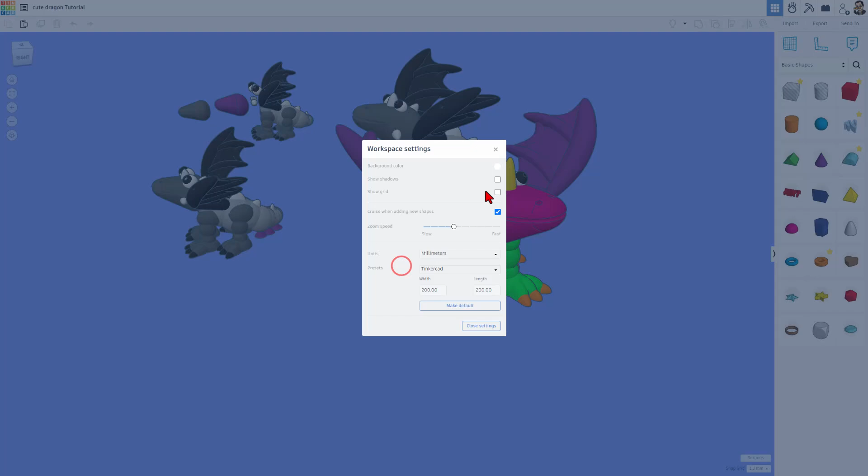That's why the colors are as they are. Normally I work with it set with the preset white, and then I also turn on the shadows and the grid. That is where I like to build from.

I have also taken my large original dragon and made one a little bit smaller. This one prints faster and I use it when I'm just giving them away. I'll also zoom in here quick and show you that I've added my own supports so that the tail prints more accurately.

The other reason we're in here, friends, is because I see users say, hey, my project is not editable. See how I can ungroup that and change things? Let me show you how users end up with projects that aren't editable.

Whenever we want to send something to the printer, we select all the pieces and then hit export as an STL. You could also use an OBJ file. It's really up to you.

I'm going to export mine to my 3D modeling folder, and I'm going to call this Cute Dragon. Instead of the word tutorial, I'm going to put July 2024, or just 24. Now it is saved for 3D printing, and it's a single piece.

The problem users have is they get back to the beginning of Tinkercad, they start a new project instead of opening their project. I'm going to change the name to Dragon STL because I'm trying to help you understand what is happening here. And then they import that STL they created.

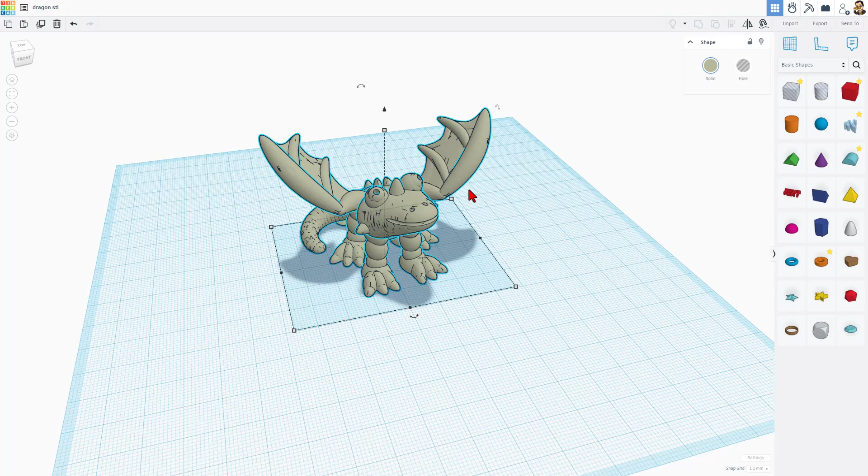This is one of the cool things about Tinkercad, that you can import STLs, whether they were created in Tinkercad or other projects. But when you import them, it takes a bit longer for Tinkercad to interpret them. After a minute, it shows up.

And as you'll see, it is a single shape. You cannot ungroup and edit it. Now, you can use brute force, so like I can bring out a hole.

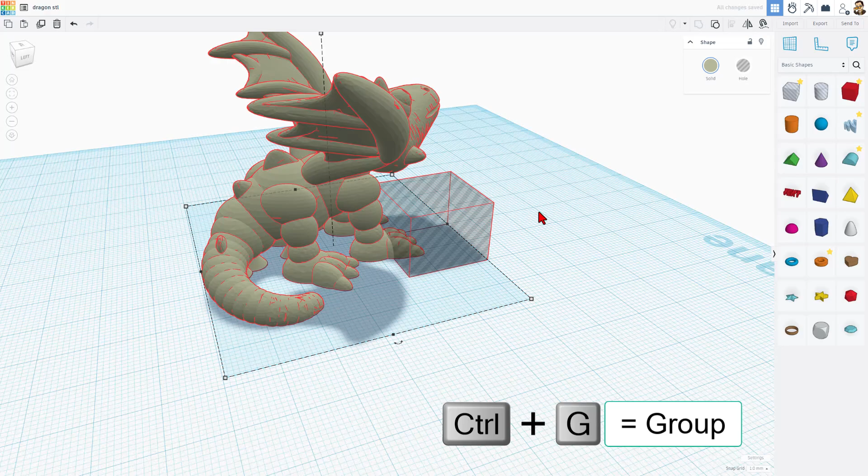And if for some reason I wanted to cut off some of the toes, I just put this where the toes are. And if we group those two pieces with Control G, notice it is editing the entire part using brute force, which can be handy for some STLs.

Say you find one on Thingiverse, but it is definitely not handy if you actually created the Tinkercad project.

I'm going to quickly bounce back to our other project and show you one more time when we hit Tinker This. These load quite a bit faster, even though I've got all these different iterations in it. And that same foot, I can click on it and ungroup and modify to my heart's content because I saved it as a standard Tinkercad file.

I see that question quite a bit on Facebook groups, so I'm hoping maybe this will clear it up.

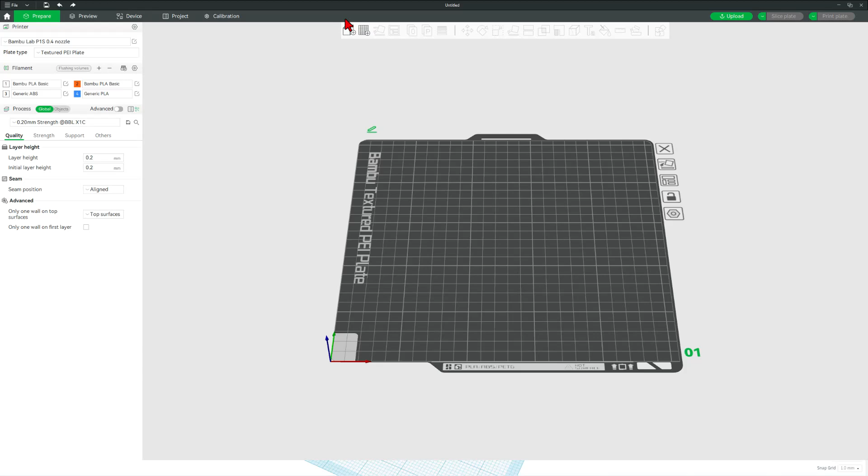We're going to choose Create Brand New 3D Project, and we're going to hit the plus sign to find that cute dragon STL that we made a moment ago. I'm going to switch to just the normal 0.2 standard.

I'm going to quickly bounce out to the device menu and update this PLA. Instead of generic PLA blue, it is now the generic PLA Purple Rain.

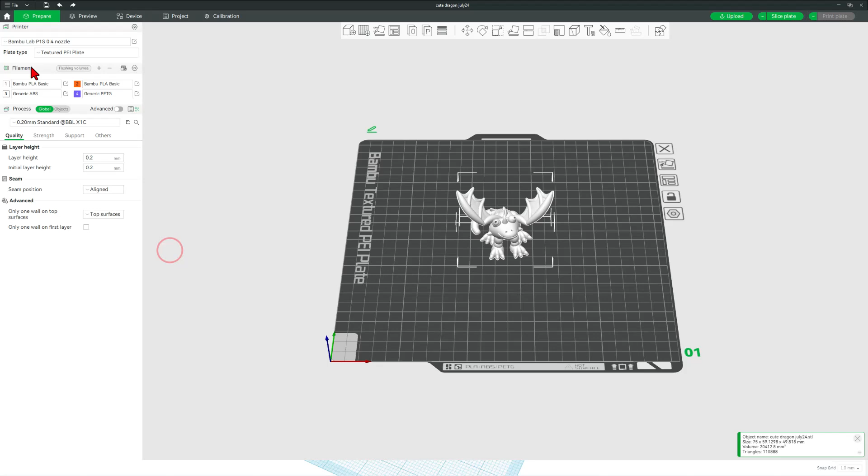When we edit it, instead of generic PLA, I want to set it to generic PETG. I'm going to make sure that color switches to the purple that we've got in there, and confirm. Once that's confirmed, I'll go back to prepare, click up here, and resync. Notice now it shows our purple and our generic PETG.

I can now right click on the dragon and change that filament to the PETG, and we can slice the plate. Notice if we zoom in, it did not add supports. That's one of my favorite things about this project - I made the wings at angles so that it is actually printable just like this.

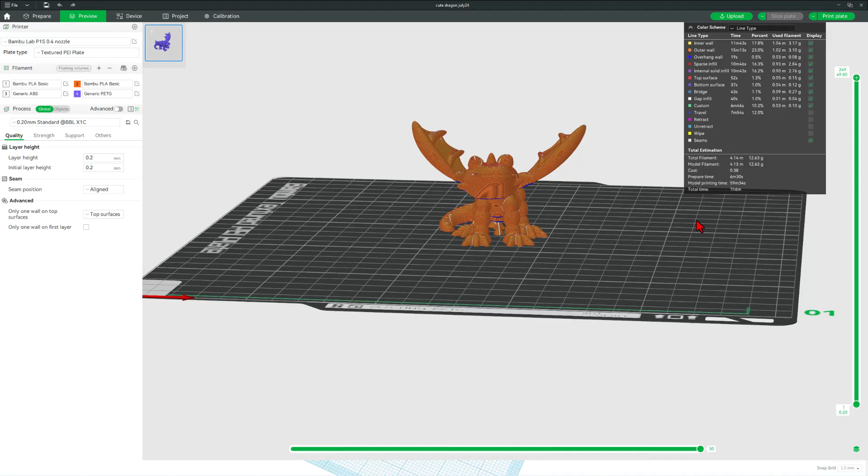My other favorite thing is this tiny little guy prints in about an hour. With all those steps out of the way, let's hit print plate. A quick double check to make sure I have the right filament - yes, it's number 4, the PETG - and we can send it to the 3D printer.

After a moment, we get the device menu, and once the download completes, we can click play and monitor the project from wherever we are.

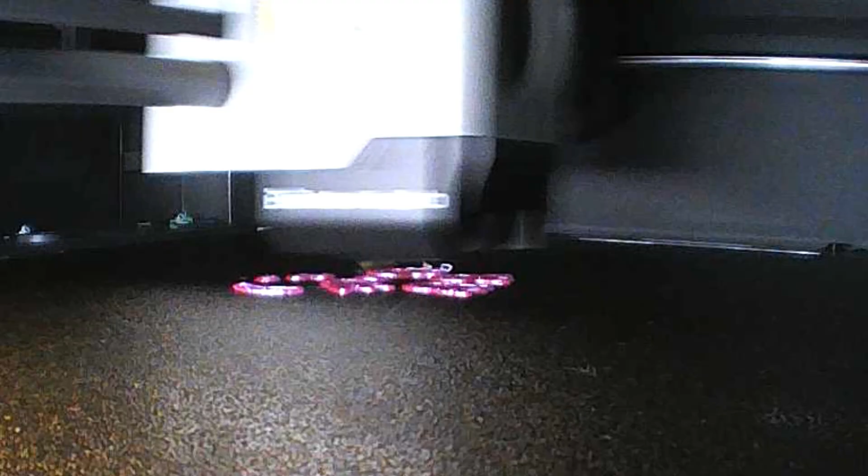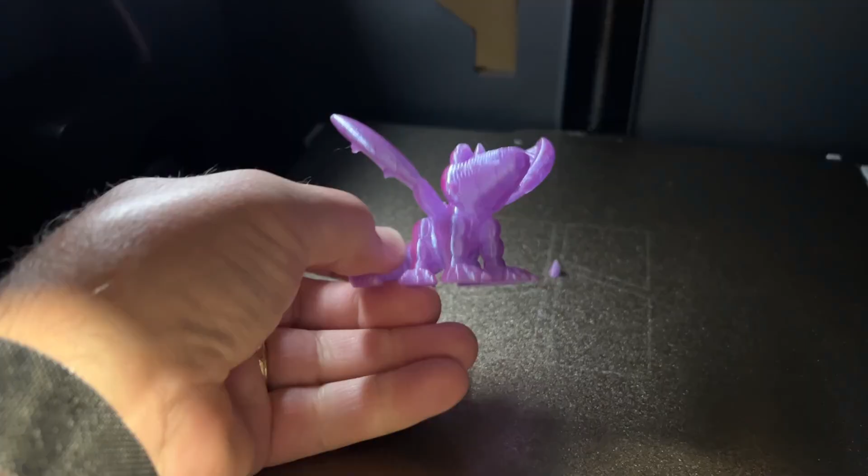Let's reach inside and check out our awesome little dragon. Totally designed in Tinkercad, printed on the Bambu Lab P1S with Purple Rain PETG filament. As you can see, that turned out absolutely awesome. These little supports just pop off, and I could not be happier with this adorable little dragon.